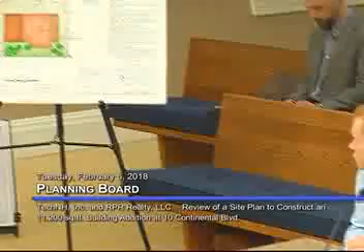The company is looking to expand the storage warehouse because they are simply out of space. They're proposing an 11,200 square foot addition to the west of the existing warehouse. The warehouse will reside where an existing parking lot and travelway exists today. We will relocate the driveway, but we will not be reconstructing any parking.

Tech New Hampshire doesn't require a lot of parking on this site. Most of the parking is on the other site where all the engineers and technicians are. They really only have about 2 to 3 employees that permanently work in the storage warehouse, so the 16 existing spaces on the site are plenty for them. We are showing 15 additional spaces for future use because we have the room, so if they ever need those spaces, they can stripe them. Those future spaces are towards the north, towards Naticook Brook.

The parcel is located within the industrial zone. It is also located within the wetland overlay district, the flood hazard, and the aquifer overlay district. We did meet with the Conservation Commission last night, and that went well. They had one comment about nitrogen fertilizer that we could easily amend with a few notes. The wetlands on site are located to the north of the property where the Naticook Brook is. There is a steep slope from the north edge of pavement down to that brook.

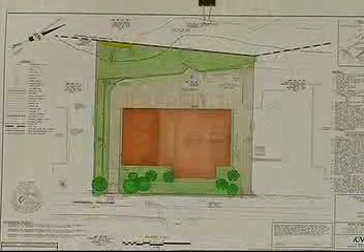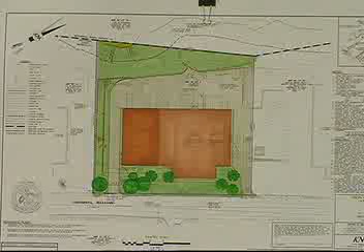We will not be impacting any of that slope or any of the adjacent wetlands. In order to accommodate the additional pavement, which is about 10,000 square feet, we've added an infiltration pond to the westernmost part of the property. We're able to nestle a little pond in between the pavement and the property line. This infiltration pond will take in about 17,000 square feet, including the addition. It will discharge all the stormwater into the ground up to the 100-year storm, so there'll be no stormwater leaving that pond and heading down to the steep slopes until about the 100-year storm. We're also reducing all peak discharge flows around the site as well.

We will need 3 waivers tonight: relief from the architectural standards for an uninterrupted facade of over 200 feet, a waiver from a paved pedestrian way along Continental Boulevard, and another waiver, which was a late addition, for a driveway separation for the relocated drive.

Mr. Chair, I can get into those now, or we can go through questions first, however you want to handle it. Let's deal with those a little bit later because our first order of business is accepting the application as complete. I don't know whether the board has enough information at this point to do that, or has some questions or wants some more presentation. What's the will of the board with respect to the question of completeness?

Nelson: I just have a question, Mr. Chairman, of the applicant. He mentioned a detention area on the west side, and I see here on the plan—I think that's the stormwater management area that's shown on the plan. Is that what you meant by it?

It's an infiltration pond. There's no outflow, no overflow from it, until the 100-year storm event. Okay, the overflow doesn't seem to show on my plan.

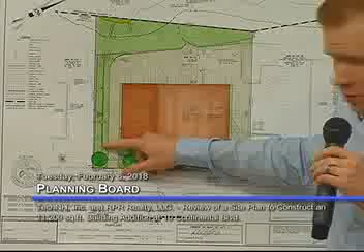So there's a strip of stone along the bottom of the infiltration pond. At the northernmost point, there's a 10 by 10 rectangle. That's the outlet of the stormwater pond.

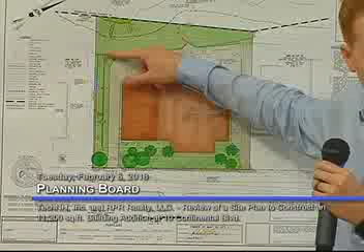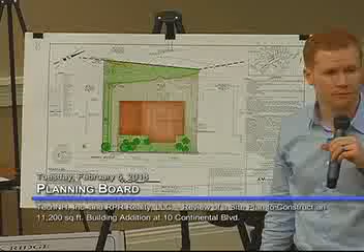Is it piped to the wetlands? There's no pipe whatsoever, it's just an earthen berm. So as stormwater fills up, it'll go over the berm. And just sheet flow then? Sheet flow over the berm—we didn't want to do any sort of point discharge to these steep slopes to try to prevent erosion. Okay, I just didn't see it. I appreciate it, thank you. No problem, thank you for going through the explanation.

Is the board prepared to consider the question about whether the application is complete and ready for review? Mr. Chairman, I make a motion that we have enough information to make an intelligent decision, and therefore we'll accept this matter for review.

Is there a second? Second by Lynn Christensen. Any discussion? All in favor say aye. Aye. Any opposed? Any abstaining? We are now set to determine that it's complete.

Does the board have any questions of the applicant with respect to the project in general or his waivers? Can you talk a little bit about whether it's a single driveway going into the facility? The facility has two driveways. To the right of the building it has one, and we'd like to keep 360-degree access because it does receive deliveries.

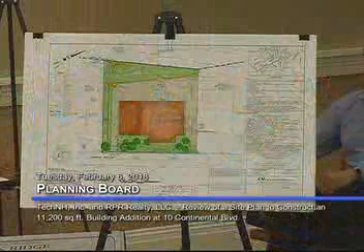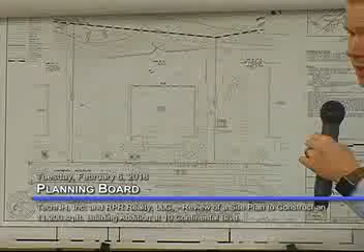That was going to be my next question. How do you foresee the traffic flow through that facility with deliveries? It'll remain the same right now. If you can turn to your existing conditions, you can see that the site has a travel way around the entire building right now. That will essentially remain the same; we'll just relocate it a little further to the west. The delivery trucks enter here, they have space to maneuver, and then they leave the site going that way.

So the waiver related to driveway separation is because that driveway, when relocated, is too close to the one at 12 Continental Boulevard? The driveway today is actually too close to that driveway — it doesn't meet the regulations. So we're in a bit of a catch-22. We have to be 150 feet from any driveway, even across the street. Right now we are 135 feet from the one to the west and only 70 feet to the one across the street. Once we switch that, we're now 135 feet to the one to the east and only 70 feet to the one to the west.

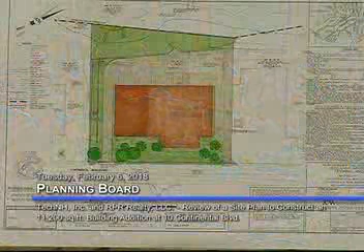In my professional opinion, conflicting left turns is the more serious issue, so moving it away from the driveway across the street is actually better. I think it's more nearly conforming to the intent of the regulation. But because the driveway is non-conforming today and will continue to be a non-conformance, we requested a waiver.

You explained that your truck traffic will go around the building that way, so that side is, at least for truck purposes, an exit rather than an entrance. Do you plan to sign that so it's restricted to exit only? We did not plan that — right now it's two-way, and we wanted to keep it two-way. I don't believe the applicant is opposed to it, but we'd like to enjoy two-way access on that side.

I agree with your logic as it stands with respect to moving it in that direction — if there's any conflict now, it becomes less so. But certainly, if you made it exit only, you wouldn't have any conflicting left turns related to the other driveway. So I don't feel strongly about it. I think your solution as it stands is as good as it is today, if not a little better.

Other comments or questions? It looks to me like the property to the east — is that a paved area? There's something outlined there. A brick patio? If I could answer that: the property to the east is Tech New Hampshire, where the engineers and technicians reside. These properties work together.

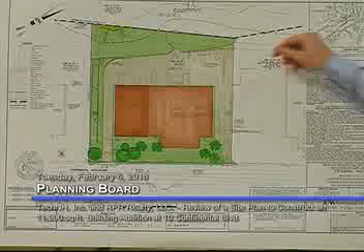And how many spaces are you taking out? We're taking out roughly — off the top of my head, let me look — 15 and 24. There's an abundance of spaces. Warehouse parking isn't high demand, but if someone were to put in anything but a warehouse, they'd have to come to this board for a change of use.

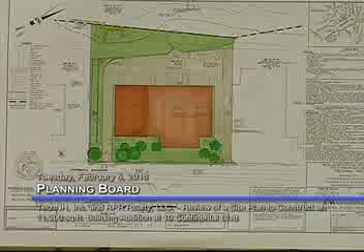Yeah, I get it, but you don't want to tear down the building for that. I agree, although I think there are some non-conformances related to how the two properties work, as well as what they're asking for waivers of. But with respect to parking, having 15 or 16 spaces and proposing 15 or 16 more to get to 30 or 31, where 30 is required, is a construct we've regarded as being in compliance in the past.

Okay, not out of compliance. I just wanted this discussion to come out. Thank you.

I think the shared driveway between the two spaces is something we've encouraged on commercial sites, to reduce the flow back out onto the street as people move around a site. We have on occasion asked an applicant to merge two lots like this. I don't know if we would do that here, given that there are two separate buildings.

The way they're constructed, I'm not sure you could have one lot with all these buildings in this configuration. But would it be normal, given that they don't own either of the buildings? Not within the company — the company doesn't own them, they're effectively leasing or renting. The owner of the property might not agree to that. They might not, but the owner of the property is part of the applicant here today. Yeah, okay, and I'm not saying that we should.

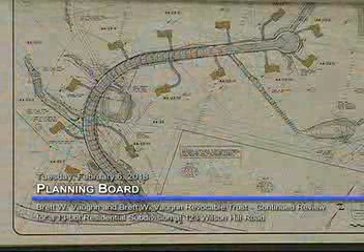Good evening, Mr. Chairman, members of the board. For the record, my name is Chad Branon. I'm a civil engineer with Fieldstone Land Consultants. Just to clarify, the area being referenced in that particular comment, there's actually two locations.

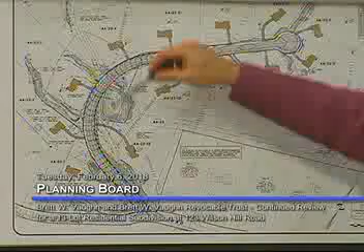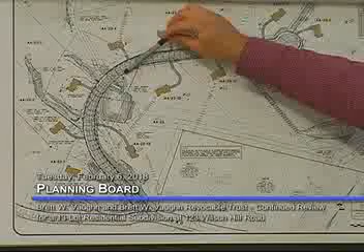The first part has to do with the access into Detention Basin 1, which is this location here. When we met prior with DPW, they asked us to provide an access onto the berm of that particular basin. The berm location is between the forebay and the detention basin, so we addressed their comments at that time. It sounds like after further review, they're asking us to modify that access again. We don't have any issues with that. We actually think there's a pretty good alternative, maybe coming in this location and then traversing the slopes down to the bottom of the basin there.

So that's the first part. We don't have any issues working with them. It sounds like in their further review of the design they've just asked us to re-evaluate that particular scenario.

The second one is really the first time there's been any comments relative to Detention Basin 2 and the access we're proposing, which is along the common line between lots 10 and 11. The design has been this way for many months now, but as we're getting closer to final review of this project, they're looking at some of these details a little closer, and they expressed some concern relative to the slope of this access through this section here.

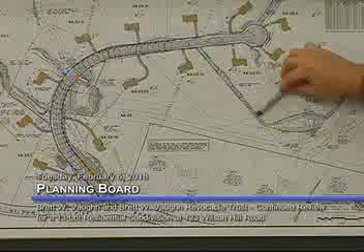We certainly think if we met with DPW again, there are a number of alternatives as far as how we could potentially get down to that basin. We could come in this direction and parallel the contours a little more, which would allow us to lessen the slope of that access, ultimately getting to the bottom of that basin as they desire. So those are additional comments that have come up in the latest review. We felt that we did address DPW's initial comments with our prior revision, but we're happy to work with them on resolving those items. Thank you for that.

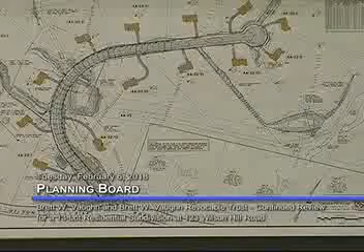Okay, Robert, what's the second item that Don pointed out? Sure, the next comment is on page 10. It is item L.

The current comment is the applicant has revised the drainage design to utilize headwalls instead of catch basins and reconfigured other catch basins as well. We note that although this approach solves the grate capacity concern, the benefit of deep sump catch basins collecting sediment is lost, which could result in increased swale maintenance for the town. Don caught that and wrote down that's a concern for them, the additional maintenance, the fact that they lost the collection of sediment there, and just wanted to make sure the applicant was aware of that as well. To resolve that after the fact is fine.

So, Chad, does that just simply require that the catch basins run a little deeper to have sediment control, or what's the approach? Sure, do you mind if I discuss this at the plan again? Might be a little easier.

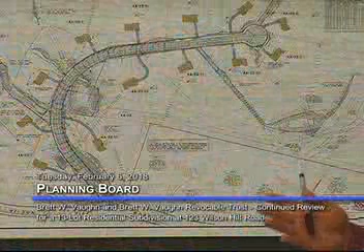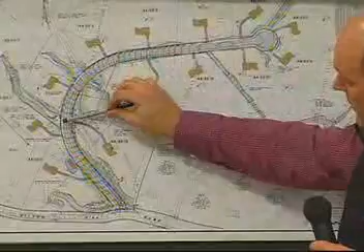So we touched on this at the January 2nd meeting. We walked through a number of the concerns at that time, which were really the remaining items—drainage and erosion based—and a lot of it had to do with the open drainage swale on the uphill side of the road through this section. We had initially had catch basins proposed in the swale, and those catch basins were interconnected.

One of the comments that CLD had was they felt that the flow we had going to the catch basins exceeded the regulations in town. The regulations are actually written to address catch basins installed in a roadway application that would have standard grates on them. The catch basins in the swales have a type C concrete grate, which is basically an opening that would allow leaves and so on to go into.

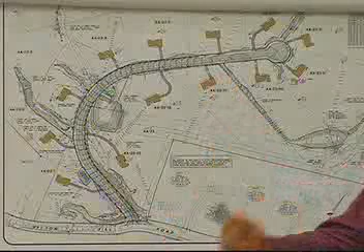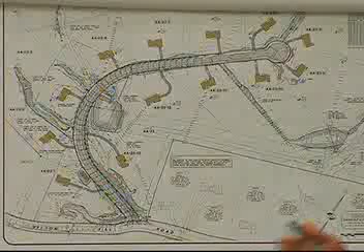In order to address that concern, we thought the best avenue might be to install culverts. Obviously there's been some discussion relative to that, and we may have to, through that comment and Ms. Twamala's concerns, meet with DPW again and see if there's a balance between culverts or if they want us to put the catch basins back. If we put the catch basins back, we would simply add an additional one to reduce the flow if that's a concern. So it's not a big deal. We think a meeting with DPW, just ironing out their preference. Obviously this is a public road, so we want to make sure the design meets their desires.

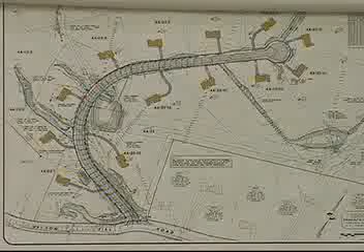Okay, thank you for the response. Robert, what else we got? Next one is on page 11, item T.

Subdivision or site review regulations 4.16.1.2.a and 4.16.2.3.a. The distance between catch basin CB1 and CB3 is 345 feet, and the distance between 3 and 5 is 387 feet. This exceeds the 300-foot maximum distance between catch basins. Although the grate capacity is met in these locations, the calculations do not account for the spread of stormwater at the catch basin. Due to the horizontal curvature of the road and the steep slope of the proposed road, the applicant should provide the spread calculations. Also, the applicant should revise the drainage design to meet the 300-foot maximum requirement between catch basins.

So it all hinges on the fact that they're more than 300 feet apart. Don wanted me to express to the board and the applicant that DPW is not willing to accept a waiver on that requirement. They would be asking the applicant to meet the design requirement of 300 feet between catch basins.

Right, and that's a non-issue, just to touch on that. We removed one of the catch basins and changed it to a culvert, and because of that, the spacing between the catch basins is now greater than 300 feet. So in the interest of addressing a prior concern, we've raised one. By adding a catch basin along that run, we can mitigate that, and that's not an issue. So you have no problem complying by adding the extra catch basin? That's correct. Okay, great. Robert, what's number 4?

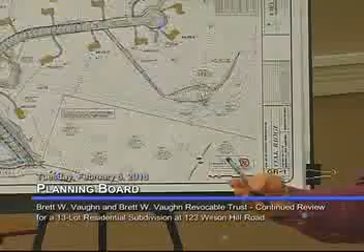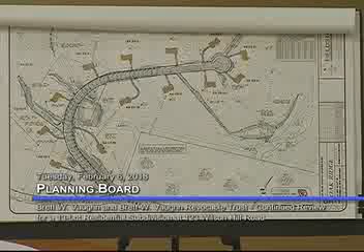Sure, so this is detention basin 2 down here. This latest round of comments, we've noticed that DPW really doesn't care for the access to it. So we're going to work with them on maybe some alternative to that. One of the things mentioned in the staff memorandum, under the recommended conditions of approval, there's a comment relative to this, and that was really one of the few comments we wanted to address before the board this evening, because we want the ability to review this with DPW and make the necessary modifications. There is a portion of the road that does drain in this direction.

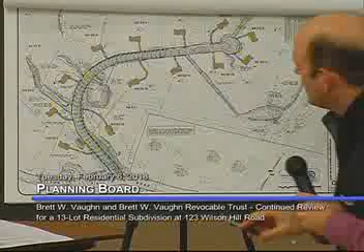There's a high spot in the road at about station 1425, which is right about here. This portion of the road ultimately drains to the east and makes its way down this topography, ultimately ending out in this basin. The treatment for the road runoff gets accomplished through treatment swales adjacent to the roadway. So this basin is really there just to help mitigate the rate of runoff from the site.

There are options and different design best management practices that we may be able to contemplate in this location after receiving this latest feedback from DPW. So the access may change some, but this will be required at some capacity, somewhere in this general location. So we'd just like to have the flexibility to work with DPW on the final design of that. To us, it's not a big deal. There is flexibility. The reason we located the basin down here is there's a level area at this location—there's actually kind of a natural berm down here that we're utilizing.

We are proposing adequate erosion control in this area, but I think it just needs to be labeled a little bit better so that the call-outs are more noticeable on the plan. So again, we don't have an issue with this concern.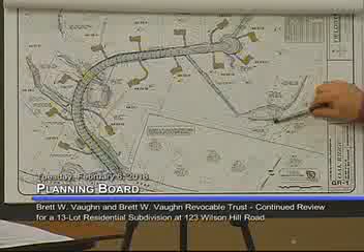Or is there one? Yeah, there is an outfall. There is an outlet structure located on basically the south side of the basin, and then it outfalls to a head wall and into a riprap, like an energy dissipating apron, so that would help the storm water change to sheet flow and reduce the energy.

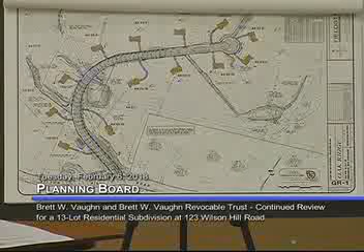And then it goes across the adjacent properties, right, to the south? It ultimately discharges into this wetland here, and this wetland continues along. Oh, that's an existing wetland? Yeah, that's correct. Most of it's going to recharge the water system for the wells? For anybody that's doing wells. Yeah, okay. Other comments or questions?

Okay, so that covers the CLD memo. And Robert, so just so we all have an understanding of it, Dawn's sense of things is that anything else left in the CLD Fuss and O'Neill memo is something she has a comfort level with as a condition of approval to resolve as a matter of engineering detail.

Yeah, and as usual, we do have a proposed condition, number 5, that the applicant shall address any outstanding comments from the town's review consultant, CLD, so that she's comfortable using that condition to take care of everything that's left. Okay, so should we add to that condition that they satisfy the forthcoming comments or the existing comments from CLD, to say, and the comments from DPW? Would that make any difference?

I don't know that it would make a difference, but you certainly can if you want to. Dawn's got her own comments separate in here anyway, and she's going to be working alongside them to make sure she's happy with CLD, especially alongside the drainage stuff. Oh, I have no doubt that she'll put in the work. I just want to make sure that we're giving her the authority to enforce it and do it. If that would make the board more comfortable, then certainly. Yeah, I have confidence in Dawn's work, so I would do it. I would propose that we do it.

Other comments or questions with respect to the engineering work? Robert? No, moving on. So if anybody's got engineering, I'll let you. Okay, I'm done with engineering. Okay, did you have more that you wanted to?

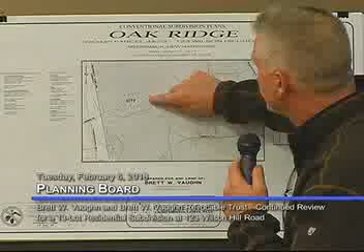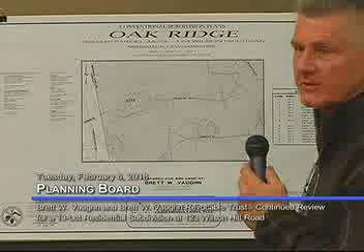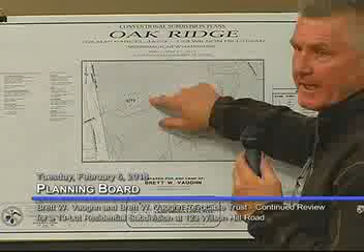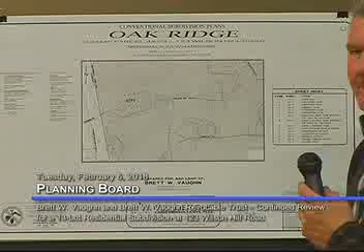There were 2 dug right here, very close to the woods, which is 119, the guy who has the deepest well and has tried to actually get water and is having trouble. Then there was one dug down below, but it's still an abutting lot. I asked him - this fellow said he's got 8 gallons a minute, and these two are both 20 gallons a minute. The ones across the road I always understood to be in kind of a different geology, and then I'm up the hill and I got 5.

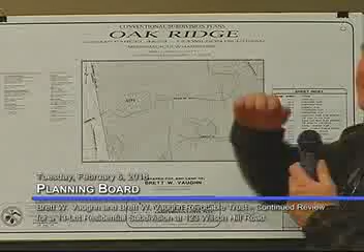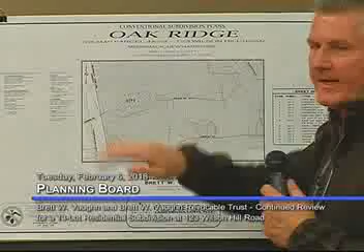But the engineers wouldn't say that's a different geology. As a matter of fact, if you look at elevation, the distance between elevation-wise is almost flat compared to where those 2 new wells were dug. You go down the road, and then they're up on the hill, on another ridge. So my point being, to assume that there's no water there - it's just not proving to be the case.

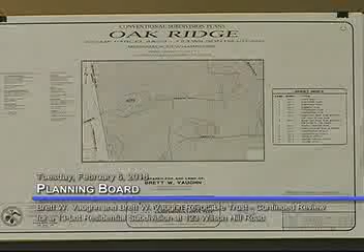I think this board has the opportunity to say we've done our best, but it's not really our responsibility to prove testing, because even if a well is there, just because someone dug their well first doesn't mean it's their water. It's pretty clear in common law, so I should have the ability to dig mine, and I've jumped through hoops at much cost to make it as good as possible for those people. So if the question is whether we require testing of some sort, I'd ask this board to say that is not a requirement, and it's not even the responsibility of the board to require it.

I also remember a comment, now that we're bringing up past ones, I think someone on the board, maybe Mr. Best, said, well gee whiz, what happens if someone says 'hey, I got no water now'? Did this board grant that it's their responsibility? What I would say is that this doctrine means the responsibility is not on you, and there's no recourse there because it's not your responsibility. It's a zone for residential.

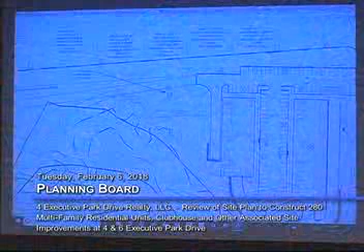So essentially, what we're looking at, in accordance with the regulatory scheme that Merrimack has, are 670 required spaces. We're going to be showing 576 to build. If you look at the area to the left, right in that area there, we've got an additional number of spaces to bring this up to 670. So we can meet the requirements to the letter.

However, we don't believe we need that many spaces based upon the nature of the units and what we believe the demographics will be. We've commented upon that in the past. We'd like to reserve that area, keep it as open space, but if needed, we have the area to build. Therefore, we would not need a specific waiver from the board, just a consensus that if we need it, we'll build it. Our drainage has been calculated to include that area.

But the Conservation Commission, as one of their specific comments -- we didn't ask for it, they put it in -- said if you don't have to build them, we'd like to think that you wouldn't unless absolutely needed, and we're certainly prepared to do that. But I want to make it clear that we meet the regulatory scheme if we were to build it all, and as I said, retain the integrity of the non-exclusive easements for the abutting parcels where the D'Angelo's is in the front, which are part of the easement that Mr...

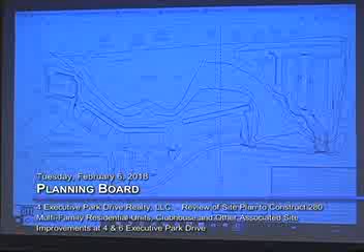That median divider kind of prevents a barrier from something going perpendicular to the driveway. So we believe that's a reasonable approach, and frankly it's going to make for a more aesthetically pleasing entrance, more of a boulevard than a conventional entrance. We'll landscape that appropriately. Similarly, we worked out the access to behind the structures for emergency response.

Originally we were considering a more permeable material, like a grass paved system. In our discussions with the fire department, they requested we make that a more conventional asphalt system, which we've done. The grading and stormwater program in the revised documents reflects that conversion to a paved surface rather than a permeable one. We've upgraded the stormwater a bit to accommodate that, and we think that's an appropriate inclusion as well.

As Mr. Michaels mentioned, in our discussions with the Conservation Commission, one item they thought was significant was directing the runoff from the entirety of the rooftops into our surface or subsurface infiltration systems. The plans we've submitted reflect that, where rooftop runoff will be collected and conveyed to the infiltration systems prior to being recharged into the ground or released during higher storm events.

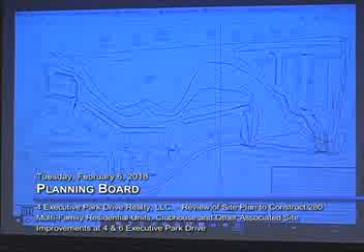All in all, we believe the comments from your engineering peer review consultant, your departments, and emergency response personnel have made this a better project. The plans in front of you tonight reflect that feedback in its entirety. We've provided letters summarizing our changes and how we've addressed those specific comments. It's our belief that we've addressed them, and if there are any additional discussions or details you'd like me to dive into tonight, I'm happy to do so.

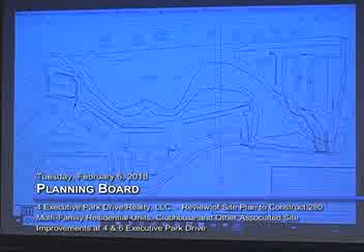We understand the board isn't going to be taking action tonight, that the board and the abutters would like to review the plans. That's clear to us, and I want to point that out. But we do appreciate being able to highlight where we've gone. We've done our best to listen attentively to the abutters, to the board, as well as the consulting people. On that note, I'd like to have Jason Plourde come up and give a brief update on traffic.

That's another kind of 800-pound gorilla that's been floating around this project for a while. We've had some contact with the state, positive contact, and rather than me belabor the issue, I'd prefer to let him update you on where we are with the signaling system and the improvements we believe we want to make.

I want to make one other note before he gets into this. There's been discussion about the crosswalk. In fact it came up in one of your proposals tonight, the crosswalk. How do people get across the road, Continental Boulevard? I think it's important. People do walk back and forth across the road. There is an issue out there.

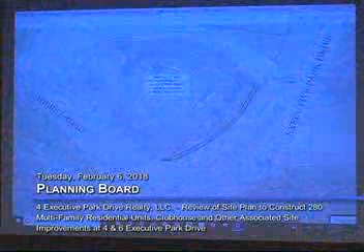One of the things we've spoken to Alan Mello about, and I contacted his attorney Jerry Prunier, is that we believe he's amenable to providing an easement for future sidewalk expansion along the front of his property, where we'd connect and bring it around. That's the area we're talking about, which would help facilitate interconnection to a point where it's potentially possible to create a pedestrian walkway across. We're working on that literally as we speak. It's not our land, we have no right to encroach on it, but he's been cooperative, and we're trying to work productively with him so the project makes sense and can help satisfy the board's concerns regarding future pedestrian utilization of this area.

Now I'm going to leave it alone because I think it's important: the state has commented on that in their report, and they've indicated it would be possible to pull something like that together in the context of the traffic we're talking about. Is it a perfect situation? No, it'll never be perfect. But is it something that may be workable? Yes, it might. So with that in mind, I think I'll turn it over to Jason.

Thank you. Jason, go ahead. Hi, good evening, Jason Plourde with Beta Group.

Went through a lot of work with the DOT, that's for sure. We've got sign-off from the Bureau of Traffic on our traffic volumes, based on a letter that they sent out on January 16th.

Yesterday, the Bureau of Highway Design issued a memorandum that I've provided to both Robert and Tim. We just got this, by the way, I think it's dated the 5th. This isn't something we've had for a period of time, so I apologize you haven't seen it. But you will be given the opportunity, because we're not trying to ask for final approval tonight.

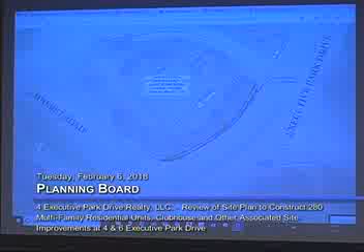Now here's the tricky part, right? How do you get across Continental Boulevard? It's a multi-phased traffic signal - that means you have the left turns going on Continental Boulevard and Greeley Street, you have the through movements going, and then Amherst Road and Camp Sargent Road go during different times. That's called a split phase because they're not going at the same time, they're going different phases.

What we had proposed to the board was that there's an opportunity that when the Amherst Road southbound approach gets a green light, pedestrians could cross, because you have the channelized right turn lane that comes down Amherst Road onto Continental Boulevard, then you have a left turn lane and a through lane.

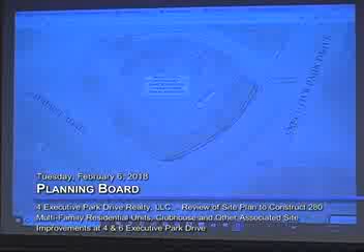Once pedestrians can cross that channelized right turn lane, there's not going to be any conflict with pedestrians crossing if they can go during the Amherst Road phase. That means through movements and left turns are going, but they're not in conflict with anybody from Camp Sargent Road, Greeley Street, Continental Boulevard, or even the right turns from Amherst Road onto Continental Boulevard. They're just going to be able to cross while the through movements are going.

One of the other suggestions that the Bureau of Highway Design had come up with was an exclusive pedestrian phase. An exclusive pedestrian phase means you stop all movements at the intersection. However, they've indicated that it would cause significant delay, not just at this intersection, but at all of the other intersections tied into it.

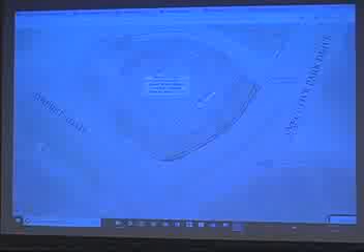So they've recommended to the Bureau of Traffic, as we go back to them with our traffic signal plans, that this be investigated. They are saying we are interested in moving forward with this. We have not said no. We are not saying there's any other alternatives. This is a good one to pursue. See what the Bureau of Traffic says while you put it into your plans. So that's where we are right now.

So the one that they want to pursue is the one that I proposed to the board originally. The coordinated one. Okay. Yep.

As far as the traffic signal systems, it's the same ones we talked about before, where there's that new peer-to-peer responsive system at Executive Park Drive and Amherst Road, and then down at Continental Boulevard, Greeley, Amherst Road, Camp Sargent Road. And then we're going to have the coordinated traffic signal system tied in with the northbound ramps and at DW Highway. So it's going to be four intersections all tied in together.

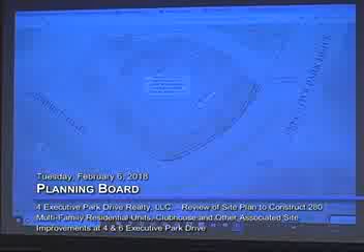The only thing we can say is that we'll do our best to continue to look at it. I just point out it's somewhat off-site for us, but I know the board has expressed concerns about this. Again, it came up tonight. I don't need to remind you again of the issue, and we're trying our best to at least implement something that may be a positive for the town downstream if needed. That's about the best I can say at the moment.

I certainly appreciate the efforts, and I know you guys have proposed developing sidewalks across all your frontage all the way down to the movie theater. And I think about this development and where it is, and why the zoning was changed to allow it to be that kind of almost mixed use, even though most of the other uses are off your site, but you're in with a bunch of commercial because people can get to them. So if you're moving into an apartment, there's an appeal to say, hey, there's a way I could get over to

Shaw's and the other things over there without getting in my car. And we've talked about this from day one. And as you can see, we're doing our best to address it. No, you are. My only point was I think it also adds value to your apartment complex to have that feature for people who might consider living there.

So can you go back to the site plan and bring that up again? I just want you to point to a couple of things for me. So the old bridge that's on the property behind where your buildings are going to be, that you're going to repair, can you point to that? Because I know it's always back there, but just actually...

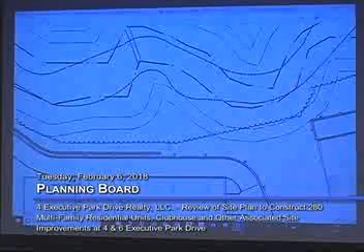So this little guy right here, that's the existing stairwell. And then that crossing, the existing bridge, is right about here. Okay. And so the proposal is that bridge obviously needs a little bit of TLC, so we're going to repair it and bring it back into operating fashion. The commission had given us some good feedback in terms of how they wanted some of the guides and handrails designed, so we'll incorporate that feedback, and that will ultimately allow us to do what we had talked about previously with the board, which is to provide...

I'll show you - a walking trail, kind of a walking path. The width here isn't necessarily representative of what it would be, but it's to facilitate this conversation. We would have a trail, and we actually thought about it - the topography here is the most favorable in terms of facilitating that access, and it would come down and connect into thereabout where that bridge is today, where it would be repaired ultimately, and then have that connectivity interior amongst the property.

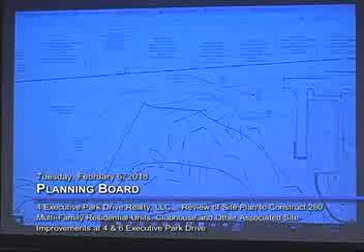So I've read probably 6 different memos from the Conservation Commission in the last couple of days because they've been busy.

On one of yours, they talked about a bridge over a crossing, wanting it to be flat bottom so the animals and things that use the stream can still pass, and it's not a round culvert. Was that yours, that recommendation they mentioned?

Yeah, that recommendation was for that pedestrian bridge, which we can do. We'll work with the commission on that. It might require a pier or something just to cross that span. But similarly, it was related to this location here where our driveway goes in. There's a very, very narrow part of the brook that runs in here.

Yep. So what we're working on is a structure. We actually provided some additional information about that structure in a package that we provided. It's going to be a bottomless arch span, so you're going to maintain the integrity of the native stream, and we'll span that and leave some shoulder on the outside so that it maintains that continuity without any physical alteration. Yeah, that's exactly what I was after.

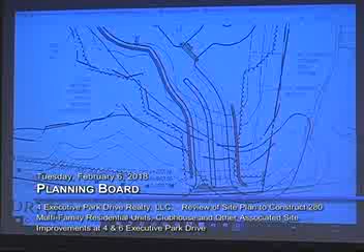Now, all of this is not just the Conservation Commission. You're going to have to get DES permits for all of this stuff too. We're working on that, including the state repair of the old bridge applications.

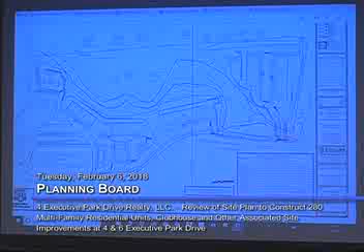Correct. Have you had any feedback from them as to how receptive they're going to be to these kinds of things? Yes, in fact I was up in Concord last week meeting with the state on a couple of different fronts, specifically about this project, and the feedback we've gotten so far has been favorable.

So we're working with them. We'll advance that, incorporate any feedback that they may have, but our first discussions were very, very positive. Okay, thank you for that.

I've recently had a chance to talk with our police chief, Roy, about the extra police patrols that the council has approved related to not only this hotel but hotels in general, to deal with crime. Part of our conversation was, as a planning board, what can we do to help the police do their job? Some of the discussions included thinking about parking lot lighting and distances people have to walk from a building to the furthest point in the parking lot, and whether that's a lit way.

Whether there's some sense that a single individual would feel safe making that walk out from wherever the building is to the farthest point of the parking lot. I don't know that it's gelled into specific requirements or instructions, but I wanted to share that with you so you could think about it in terms of having an apartment building, especially this one furthest to the south.

That extension of the parking lot from that building to the far end of that lot—you've got people going quite a ways from their building. I don't know what that amounts to in feet, but I'd guess it's probably a couple hundred feet from the building to the furthest parking space they might have to use.

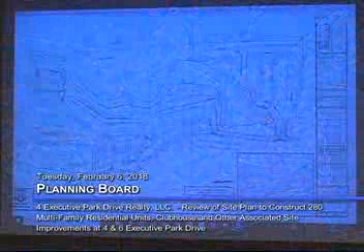So the short version is we've done that, and we've modified our lighting program a little bit based on feedback that CLD had provided. We've done a comprehensive lighting program for this area, but also the entire site. We're exceeding the minimum light levels, but not so much that it feels ultra bright, like a car lot or something.

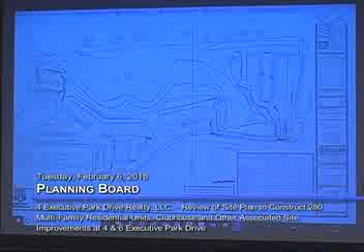But it's appropriately lit, and we've considered areas that might be a little further away from the building. In that same fashion, what we've incorporated down here—I know we'd talked about the connectivity again from the northern part of the property over to the southern part. This sidewalk exists, and you'll see these fancy little circles here; we've incorporated bollard-style lighting along that pathway so it's illuminated.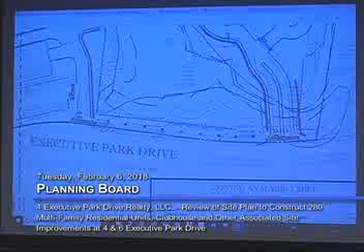I didn't want to do big, tall pole mounts because I felt that was a little extreme, but we have a number of bollard-mounted lights in here, similar in style to what was done on the hotel property, just to provide some continuity. It's a good-looking product, and it will at least light that pathway as well. I like that.

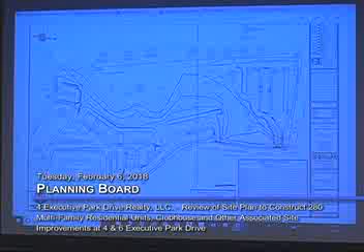Security cameras really don't fit with any of our regulations at this point, although maybe we'll revise them next time we get a chance. But providing security cameras so that you've got that same sense of reinforcement is probably a good thing to think about.

I agree with the Conservation Commission and your proposal that the parking that's drawn in gray, up in what used to be buildings E or 6, not be built unless it's necessary or unless it turns out there's a need there. There's a lot of parking on the site already. I think on the other half, on Number 4 Executive Park, there's more than you'll need, and I'd love to see more trees and grass and less pavement. I understand the limitations you have with Mello and the cross easements, but...

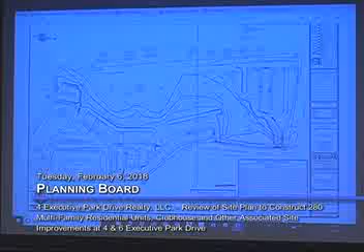100% agree with this, not building this and going without it. We could potentially put back the other one, or reduce that parking lot in the back. That's there for your regs, but we could do the same thing. That back area, I could get rid of those 7 or 8, maybe 10 spots, in that back area. I don't think we need those there, and again, leave that more open.

We can build it, our drainage has been set up so that site complies, even reserving the 59 spaces. So we could tweak that a little bit. I don't think we're going to need all of that parking in that area, but we're showing it because under the regulations we kind of have to. It's something the board could consider, because if we need to build it, we'll build it.

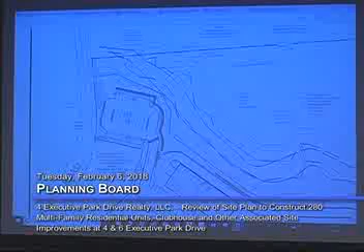We have had more than a few applications where something like that was shown on the plan to be built in the future if needed, but not built as part of the initial construction. So the reality is that the 59 shared spaces you're not counting in your equation, if your tenants pull in to park, they're going to park there, not way up in that corner. And so the thing in the corner is going to sit there empty.

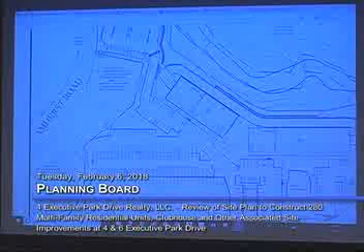Well, unless Mr. Mello wants to have people walk from there to D'Angelo's, because they're going to your apartment complex, people are going to park at the thing that's closest to wherever they are. Look, it is what it is. We're doing our best to live by the sword, so to speak, and trying to protect an interest that he has.

We could mark those if we needed to, but again, they're not exclusive. It was never intended, nor was it agreed to be exclusive. What we're doing is our best to preserve the integrity of that arrangement and also provide appropriate parking for our project. That makes sense, and it's the right thing to do.

Subject to sort of, last time you were here, we went through the equations of parking and number of bedrooms and all of those kinds of things. But if you're proposing less parking and you've got an explanation for why that works for you guys within our formula, I would be open to consider waivers of the parking requirements in this nature.

As I pointed out, I try not to compare cities and towns, but Manchester, for instance, does not have a parking regulation this intense, and they get along quite well with the 1 and 2 bedrooms which we're basically proposing. But we had a long discussion at one of our meetings. There was a lot of concern about parking, which is what drove the board to have me direct Austin to put it on. But by the same token, the Conservation Commission picked up on it, and you saw their report. We didn't write it, they did.

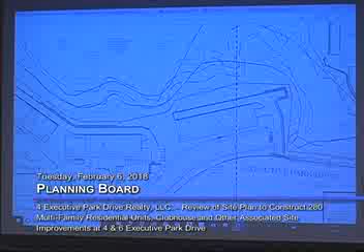Nelson? Yeah, on the to-be-built-in-the-future-if-needed parking section that's up there—it isn't shown on this plan, but on the other plan it seems to go into the buffer zone and come quite close to some of the residential housing there. I think we would want some kind of buffering or shielding or plantings that would protect those backyards.

We can show that, Nelson. I think there's two parts to that analysis. Parking lots can get closer to the wetlands than a building can—I forget the exact definitions of those lines, but there's a no-disturb zone where nothing can go, and separately a no-construction zone between the neighbors. That doesn't mean we can't ask for more separation. I guess that's a building setback.

There is no buffer, I gather, in this property. This is a commercial property, and it's abutting residential. So correct. What we've done is incorporate as large a buffer as is practical and reasonable to the properties to our west. And similarly, you're seeing this line right here.

Yeah, that's a building setback. So obviously the buildings are well interior to the property, respecting that setback. These two lines here are wetland buffers—the interior one is a 25-foot no-disturb, the outer one is a 40-foot no-building, and we're respecting those as well. So we've pushed and compacted the footprint, appropriate but not egregious.

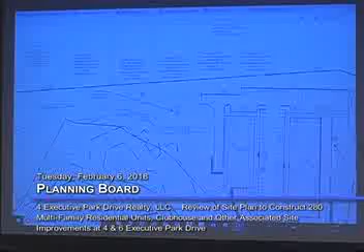I spoke to Tim Thompson the other day. He said that's up to the board, which it is. He said if we can get him our full plan set by the 9th, he can do his internal review on it. We'll be able to do that, I will tell you.

I'd suggest we've provided the full plan set—all the amended drainage report calculations are in that box right there. But I want to make that request because we've got some time frames we're working through, and we'd like to make that request to the board. Yeah, that's important to us. I know you do have those time frames.

The indication I've gotten from staff is that our February 20th agenda's got a lot of stuff on it, and they'd prefer us to think about the next meeting, which is March 6th? 5th or 6th. How much of a difference is that for you between those couple of weeks?

It's important to us. We'd prefer to move quickly, that's why we've kept these meetings going, because I think we've described a lot of this. Once we get through the final review by the town and CLD, I think we're going to be very close—it may not take a lot of time. I don't mean to speak for any abutters, but it may not take much time to finish this up. At least that's our hope.

I understand that. I think if we end up with an agenda that leads us late into the night, the board has its own approaches and policies that may make something we don't get to by 10:30 something we'd continue. Having put something on the agenda and calling the abutters in, then continuing it till March 6th anyway because we've got a full agenda, is probably not as productive as just jumping into the 6th as the first step.